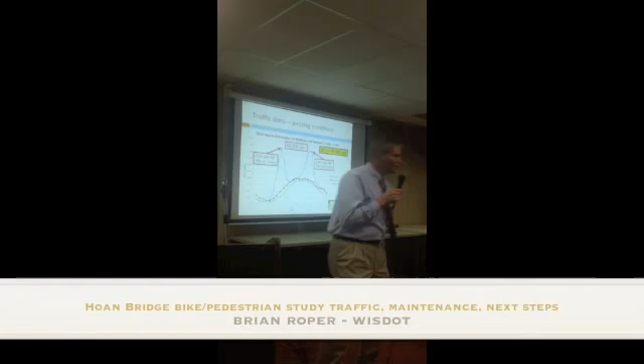I want to share with you briefly some of the evaluation that we performed in order to get a sense of how each of those would impact things.

First, we looked at traffic. Because a couple of our alternatives involve taking away one lane of traffic northbound, we needed to give a sense of what that would mean operationally, not just today, but also as we look out, part way into the overall design life of our project.

Generally speaking, if you look at these two lower curves, this is all calendar year 2010. Those two lower curves that pretty much mirror each other at the bottom, that's our Saturday and Sunday traffic in both directions on I-794 / the Hoan Bridge. Not surprisingly, this blue one that you see, that's what we have during the weekday. Those two peaks are probably recognizable to anybody who drives - this is the morning peak and the afternoon peak.

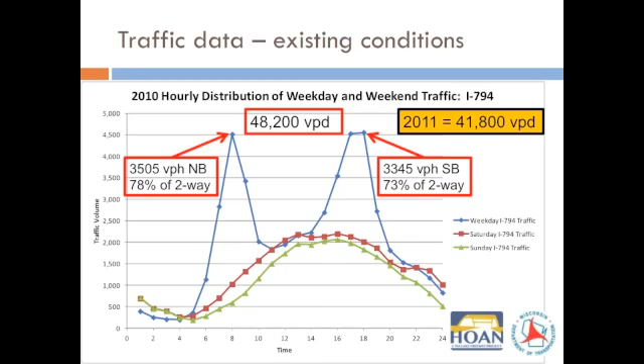Overall, we have 48,000 vehicles a day. In the morning, we have about 4,500 vehicles, and of those, nearly 78%, or roughly 3,500, are heading northbound. So there's a lot of folks heading into downtown and beyond in the morning. Then in the afternoon, it's a similar deal in which we have about 3,300 vehicles heading southbound, from points downtown and beyond, back across south towards Bayview and points beyond there.

Now, one of the things that we looked at is, well, we just had, until last Friday, as those of you who have Facebook or follow us on Twitter know, which we have on our project sheet here, the construction operations have essentially concluded up on the Hoan Bridge, and so we're back to 6 lanes total at this time.

But drawing upon the extensive traffic data collection that we have for during construction, we did see a marked decrease. Certainly, like anything, for folks, if they go out there on a given day, maybe they'll see traffic flowing smoothly, maybe they'll see traffic stop and go. But one of the good things the department has is continuous traffic counters, and we were able to see that a fair number of folks stopped taking the Hoan when it was under construction. I think over the next several years we'll see that also continue to bounce around as we go through our construction period.

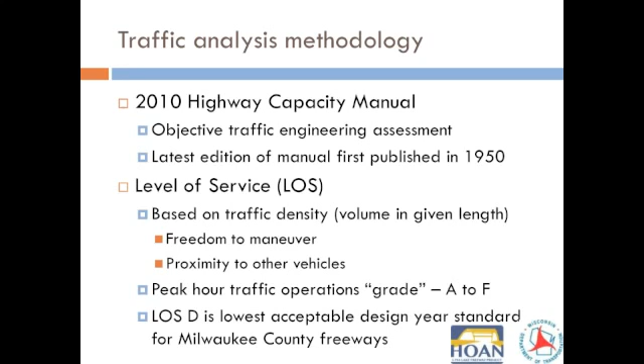As a personal aside, I've been using and applying this methodology since grad school at Purdue in the late 80s, so I'm certainly very familiar with its application and was able to provide good guidance on it as we were moving forward.

Level of service is basically how we define how well or how poorly freeway operations are going. It's based on traffic density - in other words, how congested traffic feels at a given point in time, how free you are to maneuver back and forth, how closely vehicles are. Somebody remarked before the meeting that it seems like people are following more closely than they used to. Well, as more traffic gets out within a given stretch of roadway, that's what we're going to see.

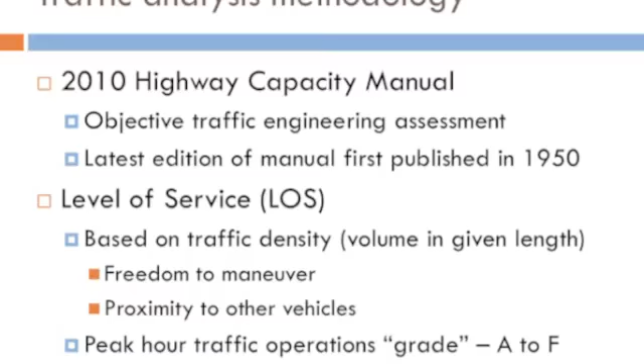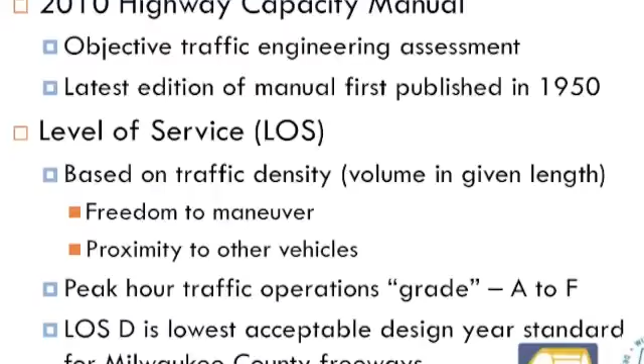Those peak hour traffic operations, we give it a grade. It's like school, from A to F, where A is the best and F, well, could be improved. Generally, the department's criteria for freeways around the state is to have level of service C during the design year or forecast year peak hour. But for Milwaukee County, again because of the increased amount of folks we have here, LOS D is the lowest acceptable design year standard.

So how does that translate into where we are today? On our left, alternatives 2A, 3B, and 4 do not take away a lane of traffic - in other words, it's kind of what we have today, 3 northbound lanes. As we look at the northbound direction heading towards downtown in the morning peak, right now we're at a middle level of service C.

60 miles an hour, basically free flow speed. You're not encountering too terribly much congestion, unless, of course, there's an incident or weather or things of that nature. So that, according to our objective criteria, would be acceptable.

The two northbound lanes, under 1A or 1B, we would have level of service D, kind of a low D. It starts to get a little bit more dense, and the way level of service works is that speeds really don't start dropping off until you reach that tipping point. So today's conditions under that criteria would be borderline acceptable.

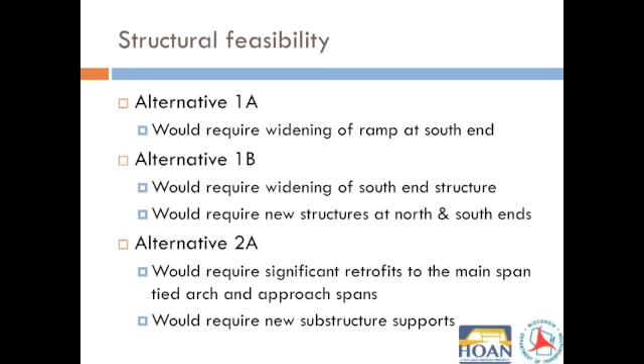Alternative 1A is very, very mild. It just requires a little bit of widening of one ramp at the south end. On 1B, as I mentioned previously, in addition to that widening at the south end, you would have to go up and over northbound to get into the middle, and then once you get to the north end, you would need to dive down and go underneath in order to tie in at Lincoln Memorial Drive.

Now alternative 2A, as we mentioned, that's the one where at that main tied arch, you would need to go around the outside. There would be some significant retrofits, and again, that's kind of like structural talk, but anytime we start talking structural talk, the cash register is ringing, and that's why the price for that one is higher. It would also require those new substructure supports that we talked about, the red arrow that goes down to the ground.

Alternative 3B, again, because it's up above, that weight, the additional weight from the shared use path, would mean that additional structural retrofits would need to be done along the 2.5 mile length of the Hoan in order to be able to continue to support it.

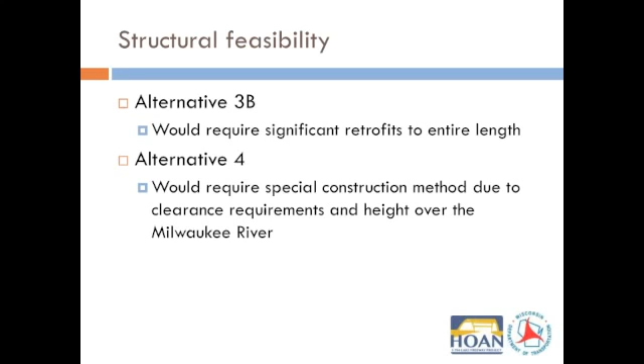And then finally, alternative 4, which is more of a construction issue, is just that it would need to be done a little bit special just because we need to maintain the Port of Milwaukee's operations.

The access locations, as described a bit more in the study, getting on and off to the trail under the 1A alternative, the 2A, the 4 - in other words, where you're always off to the east side - is relatively straightforward. It's similar to the alternatives that were looked at in the previous study where you go up Car Ferry, go across, come down Lincoln Memorial.

So it's relatively straightforward. The alternatives 1B and 3B, as I mentioned, are a bit more difficult. Because this feasibility study was limited in time, money, and scope, there are some things we acknowledge that are still out there that we did not dive into.

One of them is long-term maintenance agreements - certainly exactly how long the trail would be open, who would be responsible for cleaning, who would be responsible for snow removal. All of that is not part of our feasibility study. That's an operational issue that, once a decision is made, would need to be discussed.

In addition, impacts to adjacent facilities. The Hoan Bridge is up in the air, but there's a lot of stuff down on the ground. While we attempted to account for that somewhat with our cost estimates, for those of you who wondered what kinds of things would go into a contingency, there are many important facilities here in Milwaukee that are part of that - the Port of Milwaukee, the Milwaukee Metropolitan Sewerage District, the Henry W. Maier Festival Park, as well as other utilities, railroads, local roads, parking lots.

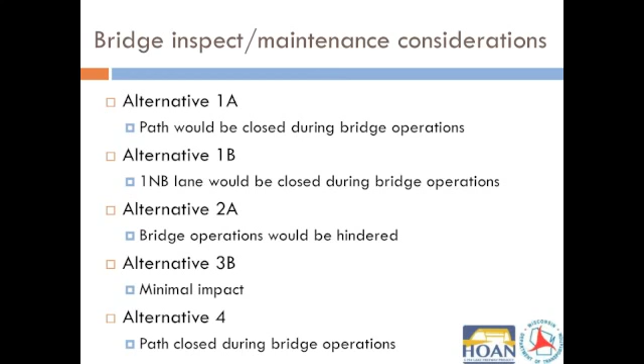There are structural connections and things in there which are very challenging and complicated. While we can do it from an engineering standpoint, we also have a little bit of unease about covering up some of those critical areas that we can get to right now to actually touch, feel, and inspect - that we would no longer be able to do so. Alternative 3B has minimal impact to some of those activities. And finally, Alternative 4 - whenever we needed to actually inspect that facility, it would need to be closed.

So that, in 32 minutes, is a Reader's Digest summary for those of you who did not necessarily catch every last aspect of what was in the summary. And a lot of you now are wondering what's next.

Well, we are here right now, and as I mentioned, we have these blue sheets that we'd like you to turn in tonight. We're looking to collect those by 5 p.m. on November 30th. So whether it's an email or whether it's these comments and things, that's kind of the period that we've chosen to stop things.

And then coming up in the winter of 2011, by the end of the year, the department is going to release its study decision of what we plan to do, and then flowing out of that, cost agreements and maintenance agreements as needed. And then, of course, the bigger project will continue to proceed until we get to the summer of 2013, where construction operations will begin for about 3 years.